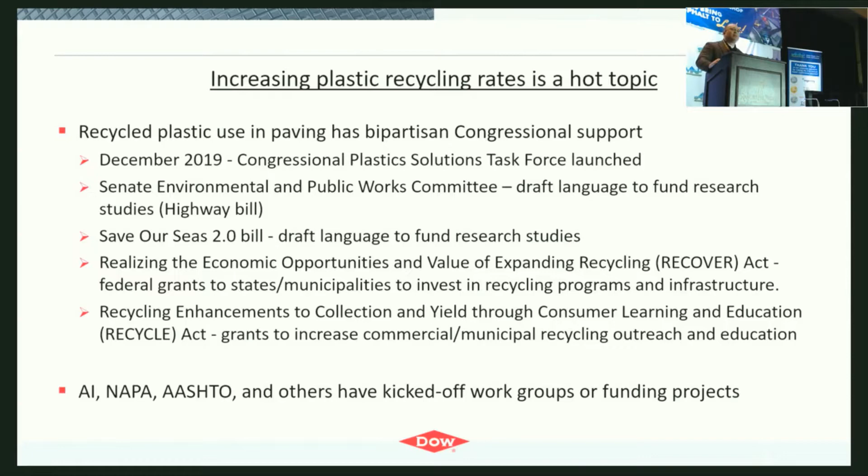But we know that AI, NAPA, AASHTO, and others have working groups. We're here today to hear about this. We had a training session in the workshop on Tuesday. So this is really running away, and we need to wrap our arms around it and stay ahead so that we can be key influencers.

So I just want to really highlight, not every plastic is created equal. From a chemistry perspective, there are many different types, and they're all tailored to meet specific properties. So your water bottle, for example, is polyethylene terephthalate, and that is a typically highly recycled plastic.

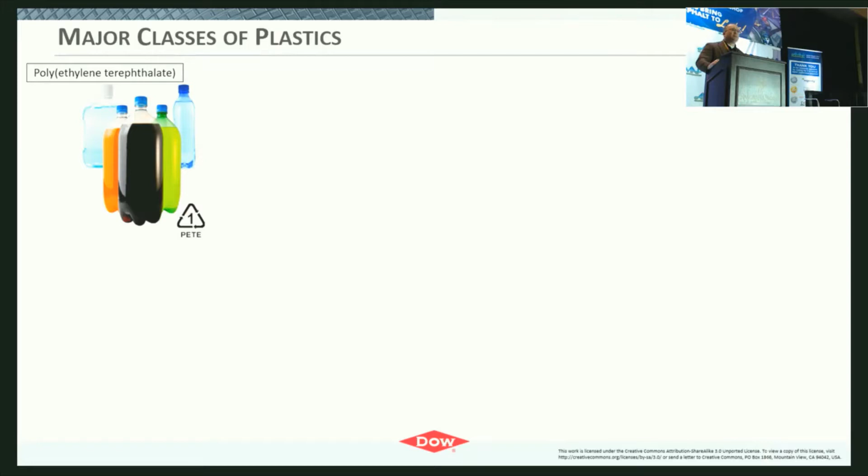It's either this year or next year, I believe, all of the major soft drink and water companies are moving to a completely recycled bottle. So this is very highly recycled, which is great. And all of these have recycle codes.

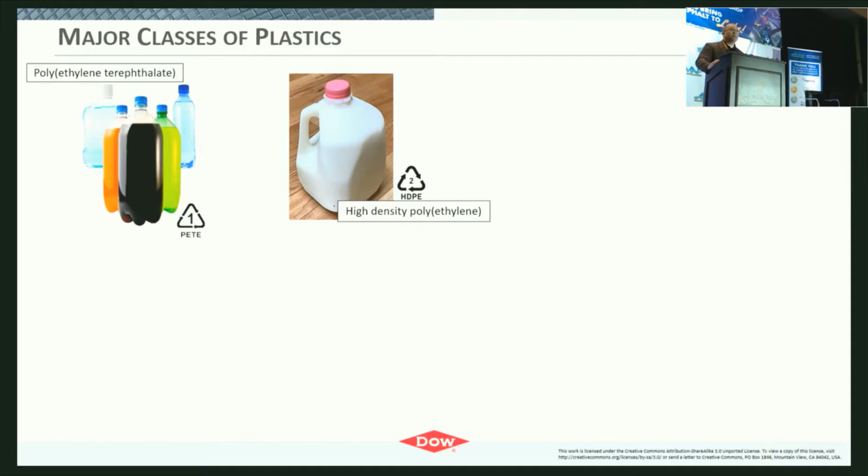So there's 7 major recycle codes. High density polyethylene has recycle code 2. It's your milk jug or anything that's a rigid type application—detergent bottles, potentially your orange juice bottle, pill bottles. This is another highly recycled material that does get reused at a high level.

PVC's got a 3. This is your water pipes, potentially plastic conduit. This is typically recycled very highly in Europe, not so much here in the US. Some potential issues with it are once you start heating it to reprocess it, it will off-gas. So that's something just to be aware of.

Low-density polyethylene typically comes from film applications, either food packaging where it could be multi-layer. This is basically to extend the freshness of your food—your steak stays red longer without adding nitrites, your vegetables stay fresher longer. Really, it's very critical with this multi-layer packaging in order to improve shelf life of food.

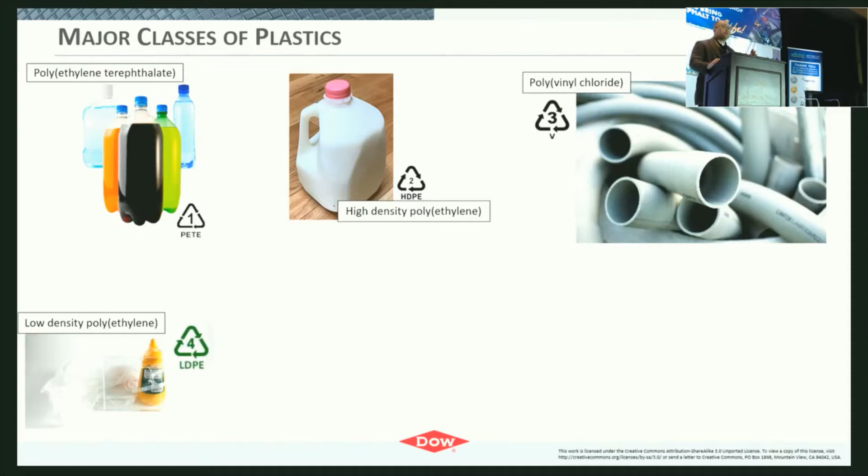Because of that, it typically is not recycled because you may have other polymers in there—it's not a pure polyethylene. Also, typically any of your condiment bottles that are squeezable, anything with a soft touch, that'll be a low density or a linear low density polyethylene.

Polypropylene's used in quite a bit. Probably the most common thing people will see is like a candy box lid—it's got a flexible living hinge that allows flex there without getting stressed and cracking. That's one of the most common things you may see every day.

Also polystyrene, number 6, that's your foam. It could be drinking cups, a lot of food type packaging can be polystyrene. Typically, if you've got a clamshell, like for fresh salad or fresh fruit from the supermarket or deli, that can often be a polystyrene material. Typically, this is not recycled in the U.S.

Then there's sort of the everything-else category, labeled as number 7. Typically that's acrylics, polycarbonates, polyamides. From our perspective here at AMAP, polymer modifiers would not be classified in that category—this is more like consumer type materials. Because of all the different chemistry here, they all have different processing temperatures, melting points, physical characteristics, and what may work for one may not work for another, especially from an asphalt modification standpoint.

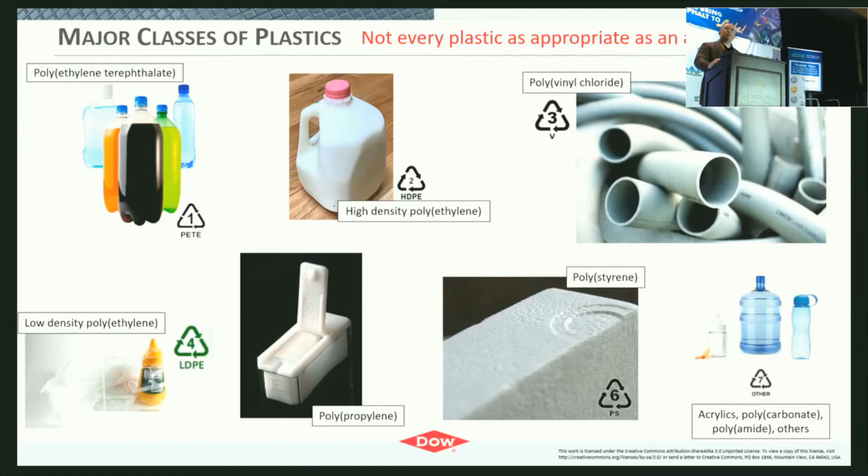Just with the caveats here too: this would be considering a wet process, like how we mostly traditionally use polymers to modify. Also, no chemical treatment post-recycling, just as is.

Polyethylene terephthalate has a melting point about 100 degrees C above compaction temperatures. PVC can potentially off-gas. Polystyrene has a high melt point. And then the others are a mixed stream. Because we really want to have a known modifier coming in, these get deselected.

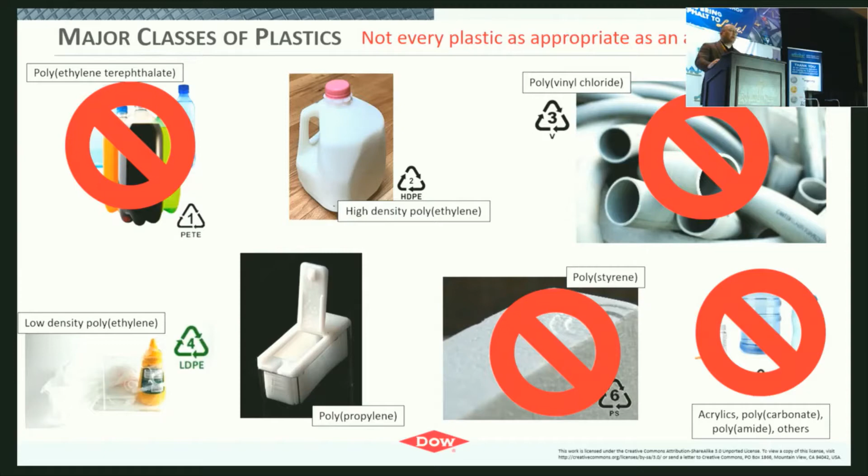So if we really start looking at what's the magnitude of these materials entering the solid municipal waste—your blue bin or trash can that's going to the landfill—it breaks out into some pretty big numbers. From the perspective of polyolefins, which would be any polyethylene or polypropylene, you're looking at around 60% of the total stream going into landfill. Other makes up not quite a quarter of that, and the rest is on the order of a little over 10%.

If you further break down the polyethylenes, of that roughly 30% that enters the stream, it's a little higher for the low-density linear lows, a little lower for the high-density. But right now you're at 30% just for that polyethylene class.

So what does that mean to us? These are all plastomers. They have been used in the past, and may still be used in some locations, as things to increase softening point and decrease penetration. Just because they're recycled isn't going to change the physical properties much, but they're plastomers from the perspective of how the organization here would see that. So they're going to have all the benefits of what a plastomer would introduce to modification.

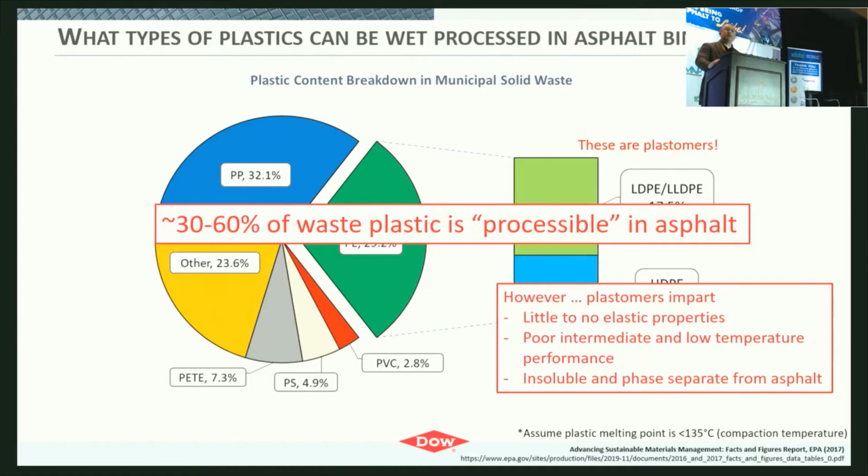But we need to realize that plastomers often do little to no improvement in elastic properties. They can have poor intermediate and low temperature performance, and they can phase separate and may be insoluble, causing some separation issues.

So what's going on? This is a global issue. I know some of the earlier talks that covered this topic alluded to the fact there's a lot of social media presence here, but not a lot of details on technical projects that have incorporated recycled materials.

From our perspective, Dow wants to be very transparent. So we look to the audience here as key stakeholders in the industry to coach or advise us on what we're doing right, what we're doing wrong. Later I'll have some technical data covering a couple of the field projects we've done, but really we want to know: are we doing the right thing or the wrong thing from a testing perspective before we go out and get too wild and crazy here.

We have to do good science. We have to demonstrate, both from a health, safety, and environmental perspective, that these materials can be used properly. They have to deliver performance equivalent or better to what's out there now. And this is really critical because, from the massive investment that goes into pavement, we can't get this wrong.

So we're very supportive of further research and really working with all of the key stakeholders here in order to prove this out. But just at a high level, here's what's been going on globally.

This is just via Google search. Some of these projects are linked via an HTML in the training deck given on Tuesday. From North America, MacRebur has looked at doing the dry process. They've had a pavement at UC San Diego, and done a project or two in Canada. Asia has done quite a bit, most of it dry processing.

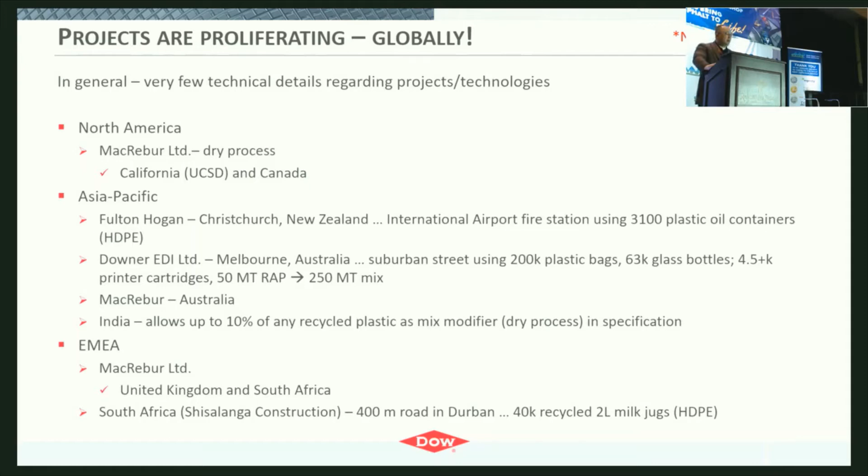So really what's Dow doing? As I said, we want to be transparent. We want to work with the key stakeholders here.

We're looking at not requesting any specification changes for the projects we've tried to go into. These have been drop-ins - we want the materials to work. I know the DOTs get heartburn every time a new material comes in asking, hey, can you change the spec?

But there's a reason why we have specifications. There's a reason why the numbers are the numbers. We may not like them all the time and we can argue, but they're the reality, and we've gotten through the torturous path over the years to where the numbers do mean something.

So we've had two projects I'll highlight. The Texas project, we paved a section at our Freeport manufacturing facility, that met a TxDOT PG70-22. The Michigan project, we paved some parking lots, some county roads as test sections, targeting Michigan DOT PG64-28P.

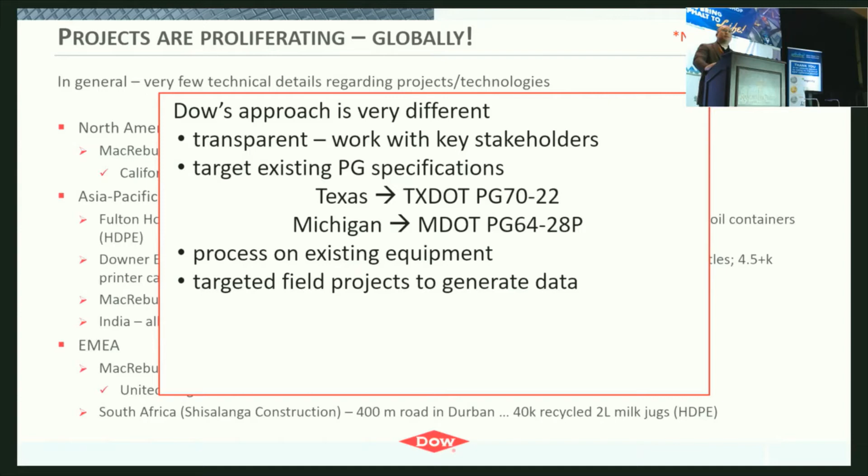The goal here is to process on existing equipment, target field projects to generate data, take those samples to reputable test labs so that they can do their studies to tell us, is this a good idea or a bad idea?

One of the things we've done is taken an RET with Elvaloy trying to mitigate the plastomer performance gaps. The point of that is to serve as a compatibilizer - Buzz presented some data yesterday on the work that NCAT's done in that realm.

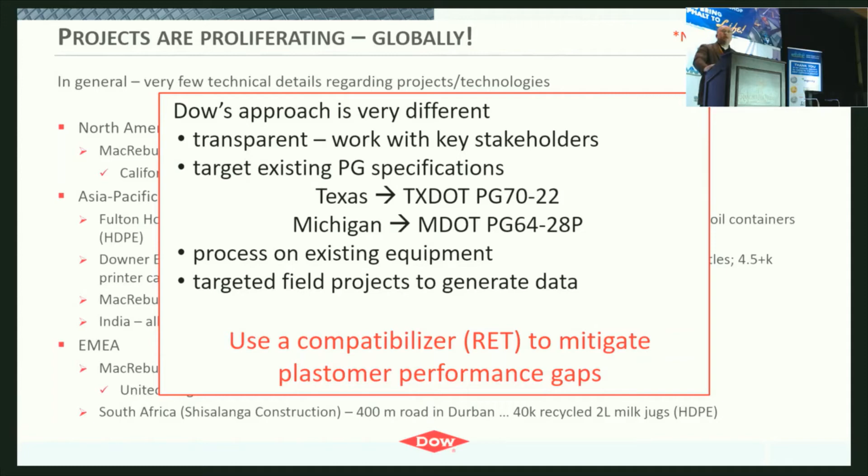We've been doing things in a parallel path. Our data correlates very well with their binder test data. But our spin has been: let's fix the gaps of these materials when they're used as plastomers. Let's put them in as elastomer, meet DOT specs.

So just a reminder of what RET is. It's a reactive elastomeric copolymer. It has an epoxy functional group on it - a co-agent or co-reactant can be used as an epoxy hardener to chemically bond the polymer to asphaltene groups that are functionalized in the binder.

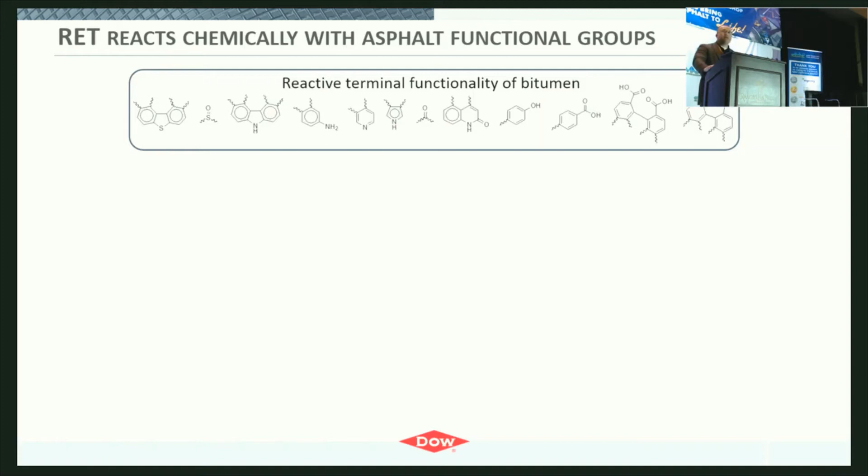Typically PPA is used at low amounts. There are other co-reactants out there that work also, but this is just a terminal functionality in the bitumen that Elvaloy typically will react with. You can thermally cross-link it, and speed the reaction up significantly by linking everything together with a co-agent. In the lab, with quart-gallon blends, after your polymer is dissolved through low shear mixing, you add your PPA - in about 2 minutes you can saturate your performance grade and your phase angle.

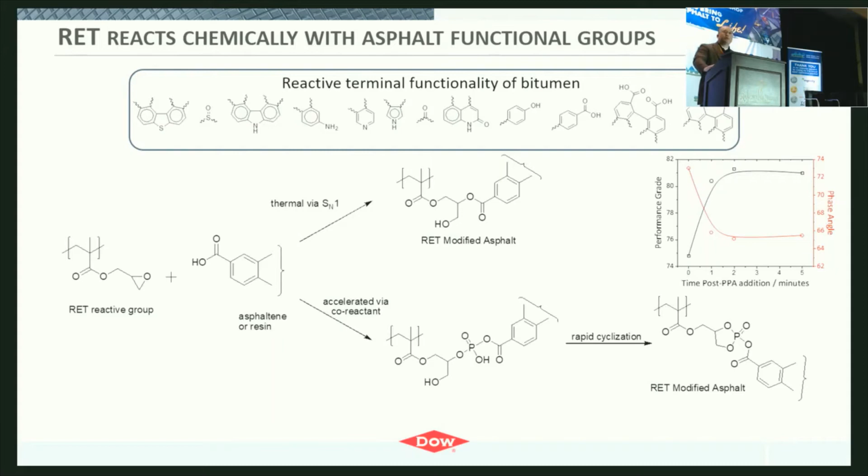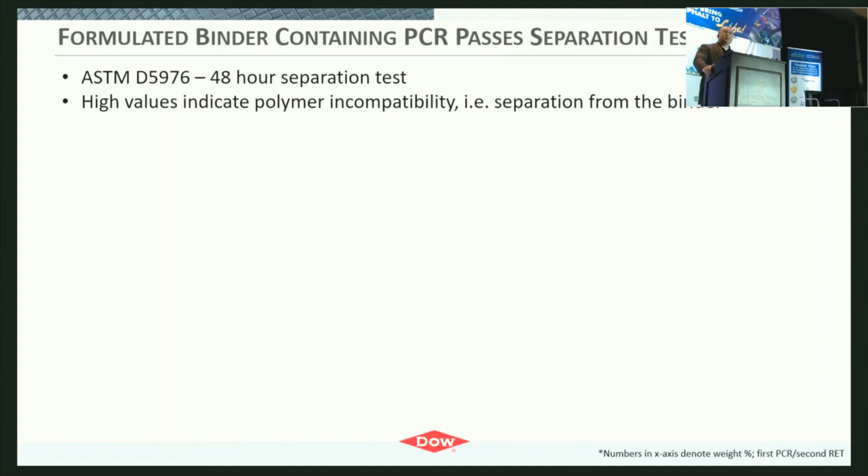The first thing we looked at was the separation test. High values typically indicate polymer incompatibility. On the bottom scale, the first number is the weight percent plastic, the second is the amount of Elvaloy. The PCR samples had very high separation values - this was a low-density polyethylene from a clean stream, exclusively that material, and we're looking at over 40 degrees C separation value.

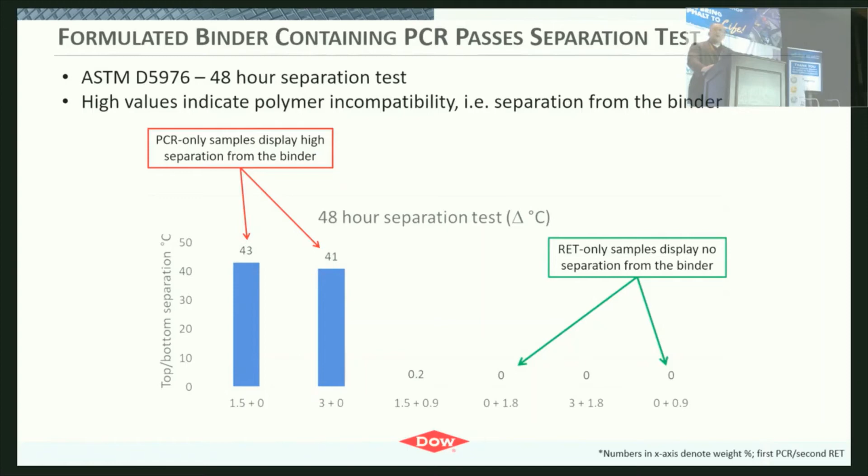Looking at the RET-only samples that were the controls, as expected at 1.8% and 0.9 weight percent dosage, there's no separation. The combination of 3% plastic and 1.8% also had no separation. So adding the RET here did compatibilize it and did solve the separation using this ASTM test.

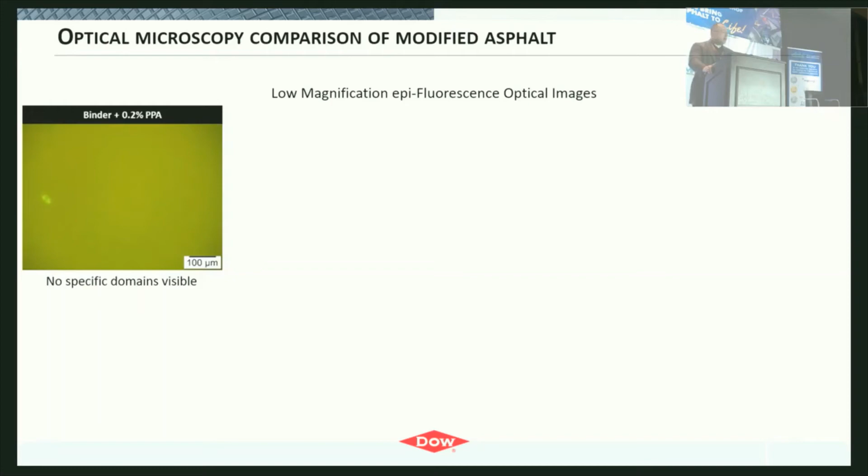Looking at some optical microscope images to see what's going on - this is the binder only that did have some PPA in it at the start. As expected, it's just smooth, no contrast from materials in there. Adding the Elvaloy, since it's a blend-in product and it reacts, it's also homogeneous and looks very similar to the binder.

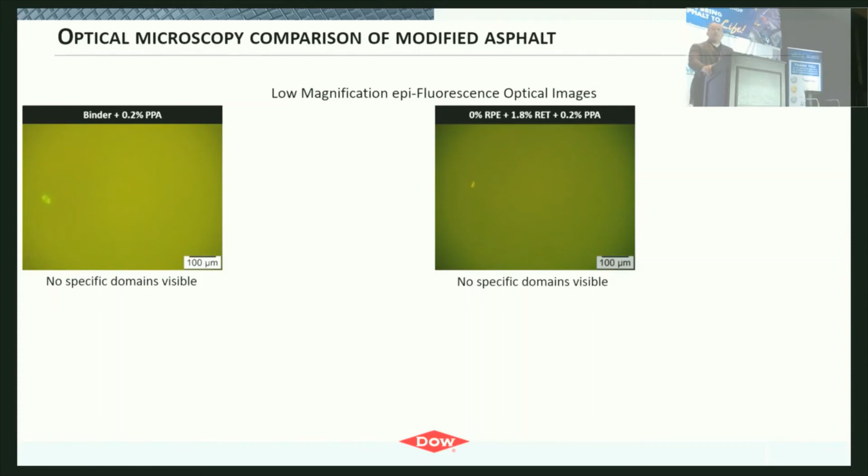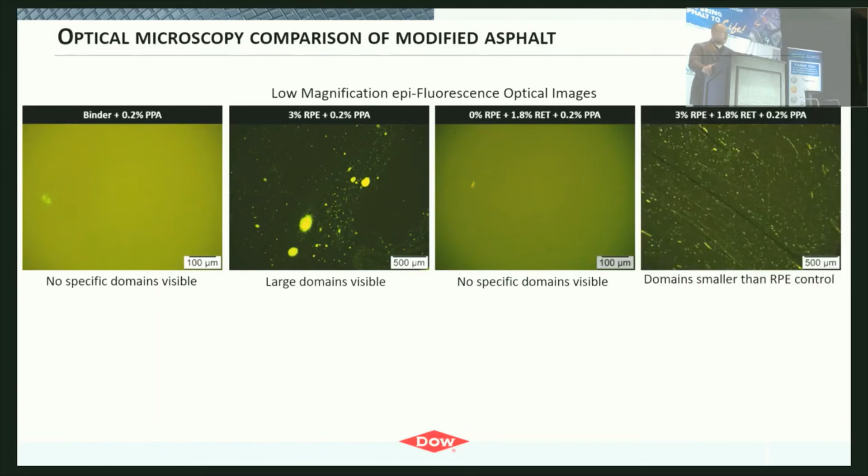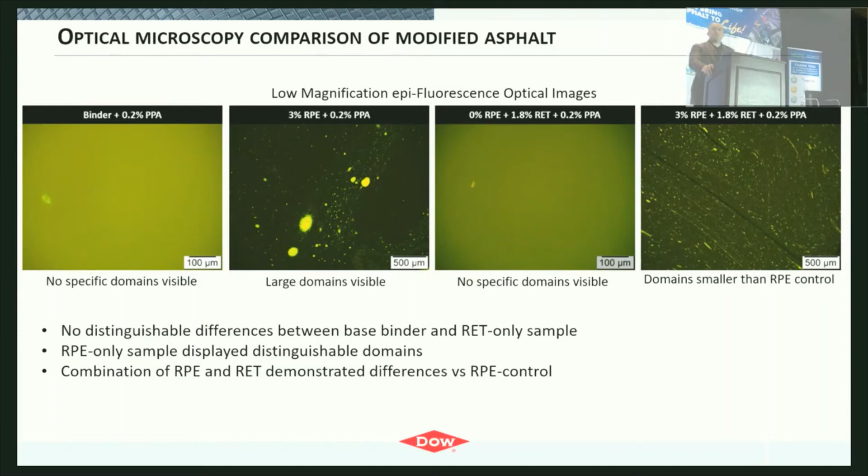This is 3% of the recycled polyethylene, and you start seeing domains that are large and visible. In the dark field portion, you can see a very high level of contrast - the plastic is fluorescing very highly here. Adding the RET, the domains become much, much smaller. There's really no distinguishable difference between the RET only and the unmodified, so we did seem to improve the micro domains of material here. Typically 3% plastic is on the very high side - since we're trying to meet PG spec, that would be dosed down to lower levels.

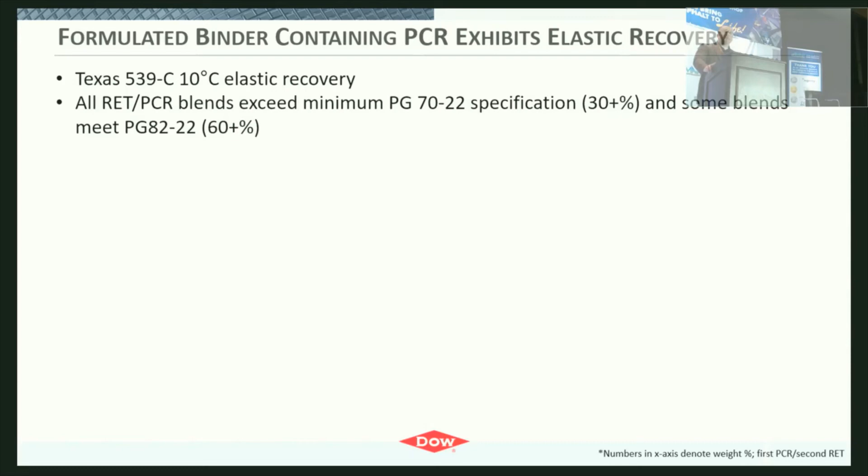Looking at elastic recovery, because we want to show there is elasticity here, in these formulation ranges we were able to easily meet the PG70-22 binder spec. The minimum requirement was 30%. Some blends hit higher than 60% ER - those would have met the PG82-22 for TxDOT. We saw similar trends as with separation: the RET-only samples had high elasticity, 60 and 70% respectively for the 0.9 and 1.8% dosages.

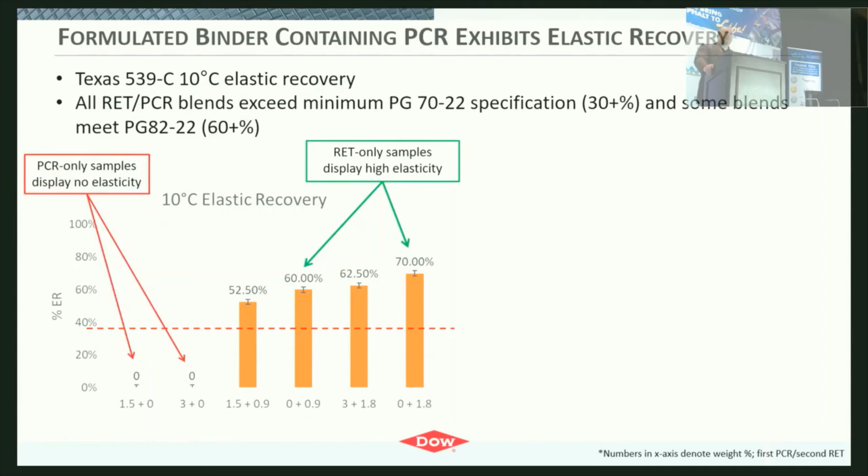The PCR samples actually failed - they had no elasticity because they broke during elongation. Here's a side-by-side picture of the normal polymer modified in green and the PCR-only modified in red. Once you add the combination again, you see an improvement that makes it more like the RET alone, putting in 1.5% and 3% respectively of the recycled plastic.

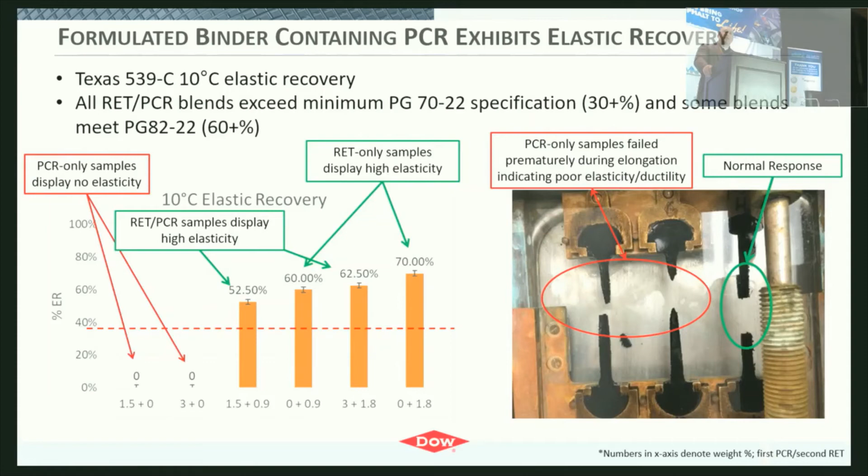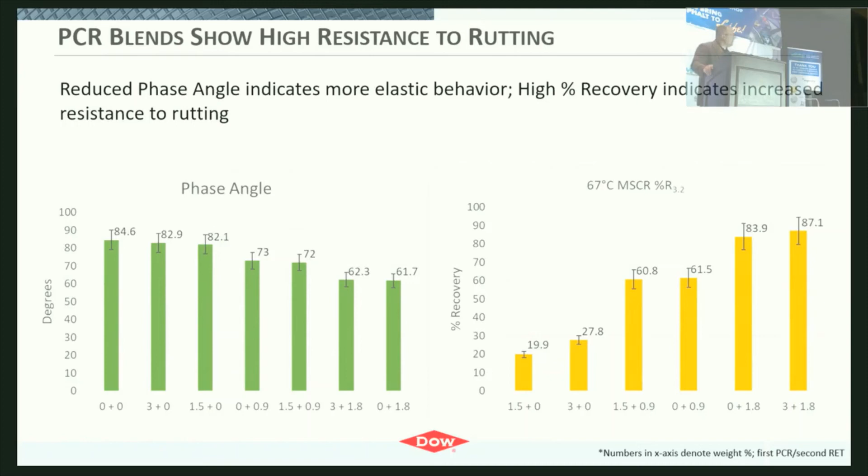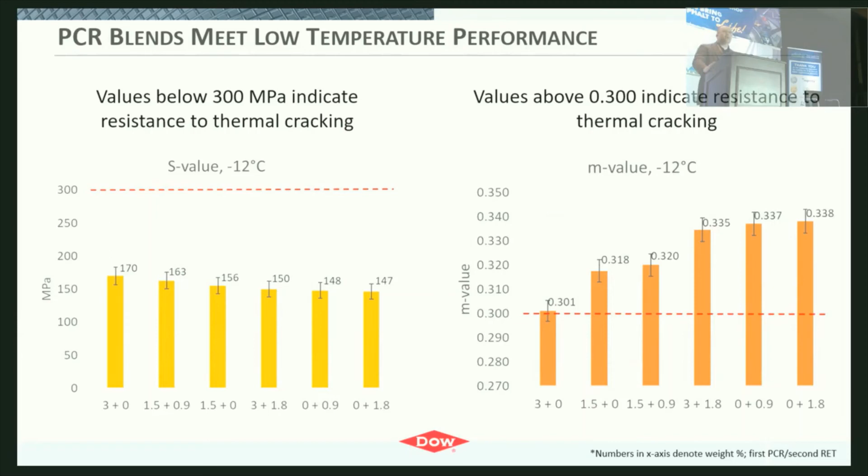One worry also is low temperature processing and low temperature performance. In all cases we did meet S value - we're at borderline for the 3% recycled polyethylene only, but again the trend here was when you combine the RET with the recycled polyethylene, it's about the average of the unmodified or PCR-only versus the combination.

Going through some case studies - the partners here were Martin Asphalt, American Materials, and Vernor Construction, all based in South Texas. This 70-22 targeted project, roughly 1 lane mile, used 750 kg of recycled material. This is an equivalent weight of around 120,000 plastic bags - we did not use plastic bags, just an equivalent weight. Those are single-use grocery bags that are really not single-use. Around 120,000 were used for a lane mile.

We used 1.5% RPE, 0.6% Elvaloy, and 0.2% PPA. By incorporating the recycled material, we were able to cut the Elvaloy dosage by half. So overall in this case, the binder was cheaper using the combined materials versus an elastomer only. This was a Type D mix design, 19% RAP, around 5% asphalt binder, and a limestone dolomite aggregate.

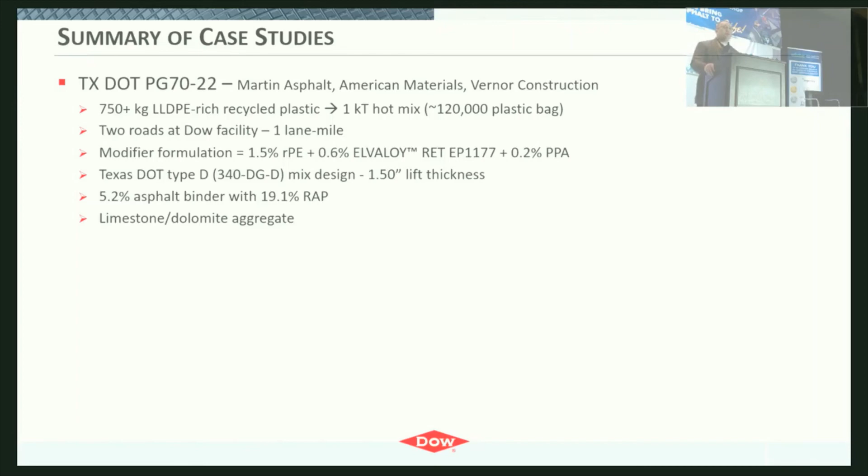In Michigan, the Clink Group produced the binder, Central Asphalt and Pyramid Paving did the hot mix, Fisher Companies did the construction. Winpak, a Dow customer, supplied the recycled material. This was a little different than what we did in Texas - it was post-industrial recycled material, industrial scrap, also a mixed stream. It was around 75% linear low density polyethylene, and the remainder, around 25%, was an engineered polymer with a melting point above 185 C.

So this was an example of a multi-layer food packaging material that is non-recyclable traditionally. If you would put this wrap in your blue bin, it goes to the landfill, not the recycling center, because it's considered a contaminant.

We did pave 6 public roads here, 6 lane miles total, around 30,000 square yards of parking lot. Because that was a bigger project, we used around 4,600 kilograms of this PIR, equivalent in weight to over 750,000 single-use grocery bags.

We also paved a project at Saginaw Valley State. The formulation was 1.2% recycled material, 1.2% Elvaloy. This was a Marshall mix design. There were a couple of different paving types used, the majority a 12.5 millimeter mix, but a 4.75 millimeter sand mix was used on one road as a thin lift.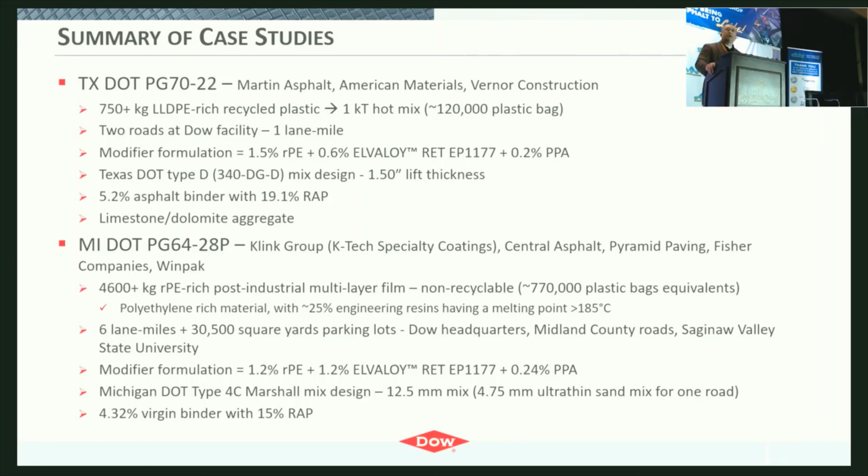This also introduced the RAP material. Basically we were putting in these new modifiers as drop-ins. None of these projects were tailored specifically here; they already were on the books, and we dropped in because we were targeting to meet the specification.

This is the only data table I have, but what we've got here is in the left series of columns is the TxDOT PG70 we targeted, and in the right column was the MDOT 64-28 we targeted. From a viscosity standpoint, we were well below the maximum for both materials.

We passed the upper PG requirement, and elastic recovery we passed, in both cases significantly higher than the minimum. From a separation standpoint, we did fail the field sample for the Michigan project, and we believe that's because of the mixed film. In this case, a mill was not used to process the polymer, just low shear mixing, and because of that there was some particulate matter visible. We chose not to screen that out because it was there in the binder, and that's one hypothesis for why we were above the allowable separation test.

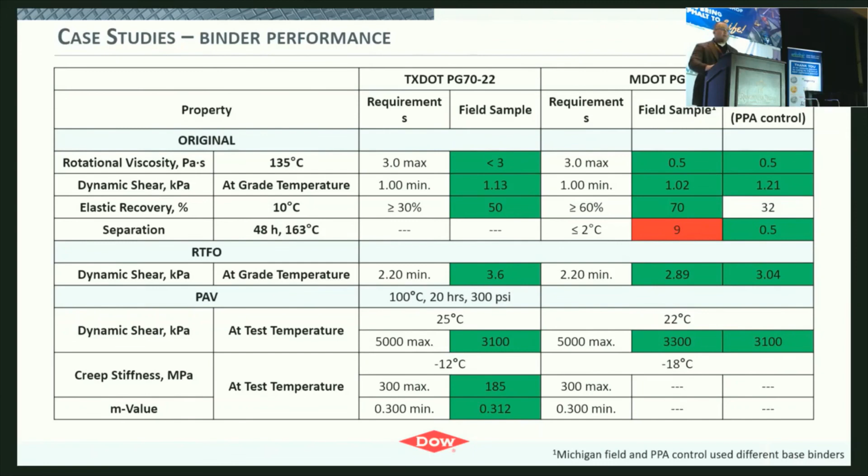Also looking at the low temperature and the intermediate temperature results, we passed both of those.

So just showing pictures as we wrap up. This was the construction at the Texas project at our manufacturing site. The comments we heard from the hot mix supplier and the construction company were that they were surprised in a good way. One thing they noted was there was an odor difference between the mix, and when they started thinking about it, there was no sulfur smell. There was no sulfur crosslinker here, so that was absent, so they were smelling more of the neat binder compared to what they thought would have been in a PMA.

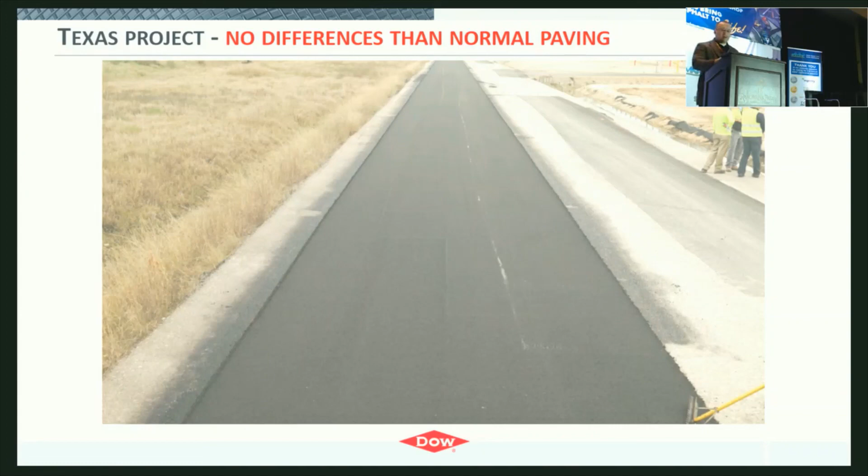There were also some concerns, and we worked closely with them around who was going to clean their trucks if there was fouling, was this going to get compacted the same, what was different. The messaging we heard from them, and there's an interview in Asphalt Pro magazine with Central Asphalt, but their words were this was boring. It wasn't any different than normal, everything was good. This was a 1.5-inch lift, looked the same, compacted the same.

The Michigan projects were very distressed pavements. Here's just some snapshots, most of them rural. There was a mix of more farm type distresses. Some were neighborhoods and also farm type distresses, but you saw pretty much all the different types of failure modes in these pavements.

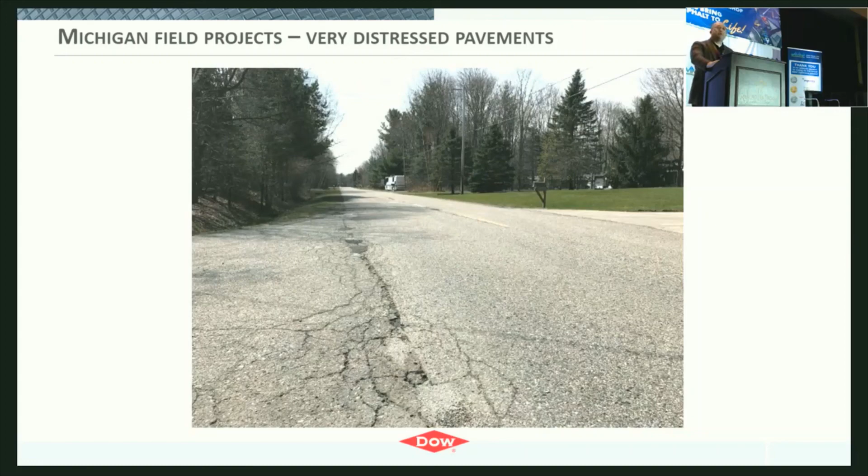Normally those would have used a PPA-only modifier, which is why we had that as the control in the data table. But here we paved our global headquarters, around 30,000 square yards of surface. This was all done in about a day.

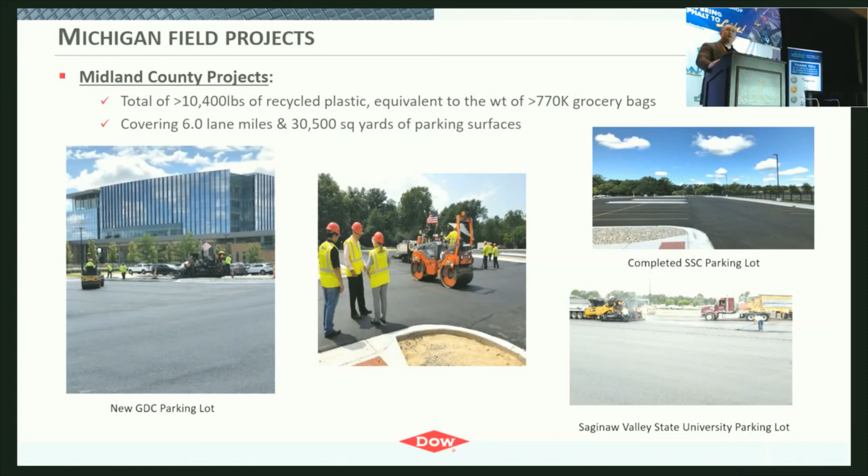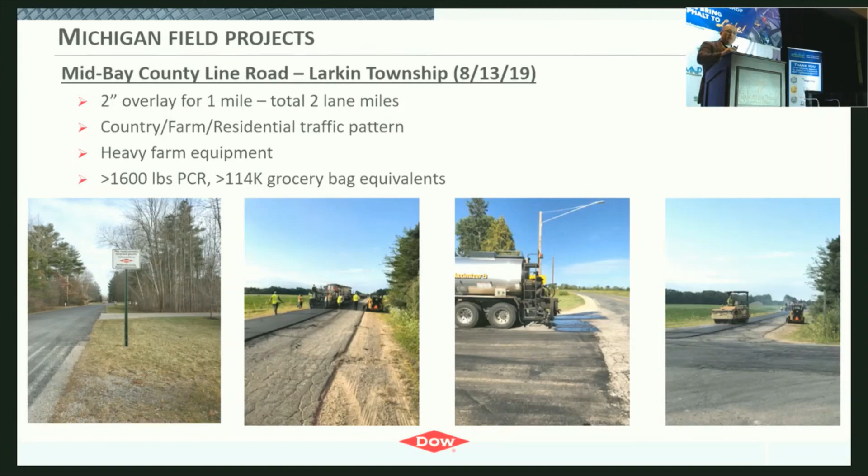Here's paving Mid-Bay County Line Road. This was a 2-inch overlay, two lane miles total, a mix of traffic here. You can see the distress level down on the unpaved section that was being covered. But everything was boring, which we liked.

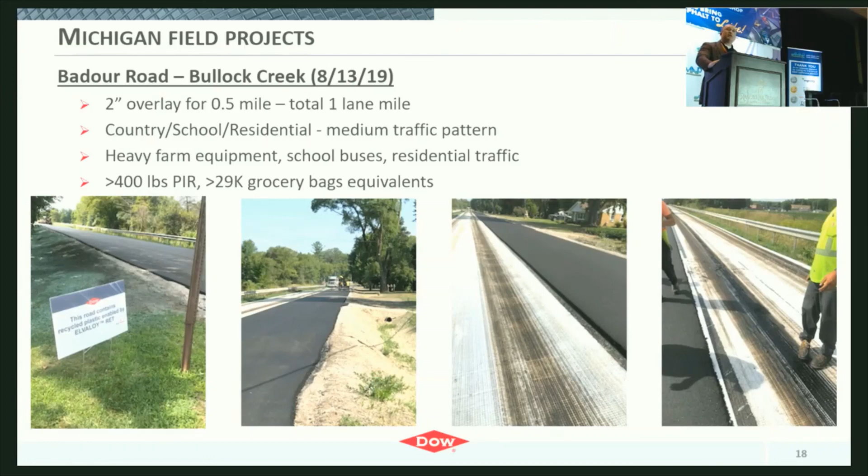There was no change. Here was a more residential road. This one did use a geomembrane between, already spec'd in. This was part of a DEQ project in Michigan, and that was a requirement, to use the membrane.

A cul-de-sac, another neighborhood road, and that's all I have. But thank you, if there's time I'm happy to answer any questions.